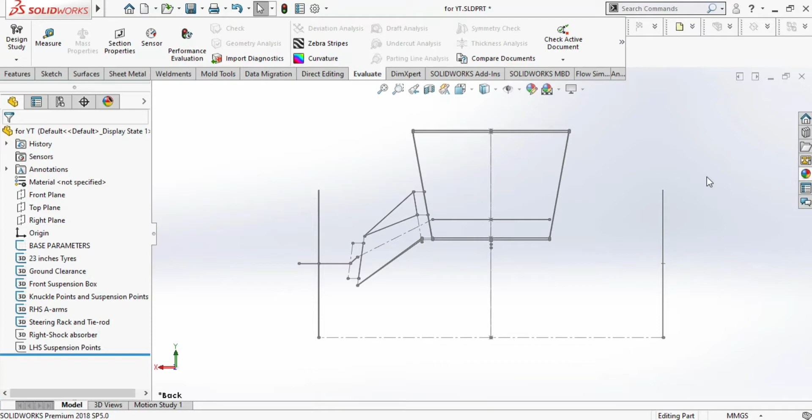In today's video, I'm going to show you guys how you can design a suspension knuckle or an upright. It will be a simple design, but you can take references from it and adapt as per your requirement and designing needs. So without wasting much time, let us begin. I am creating the suspension knuckle on the double wishbone suspension geometry.

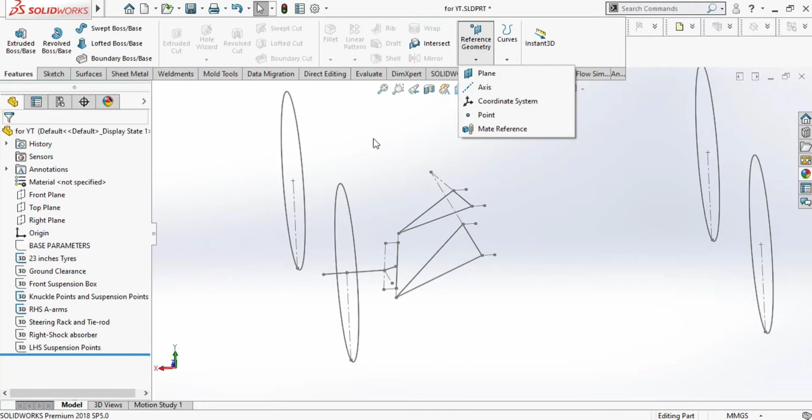Firstly, we will create a plane which will pass through the steering axis, or caster angle axis. For that we need three references. First two will be the references which are upper ball joint and lower ball joint coordinates, and the third reference will be the main right plane.

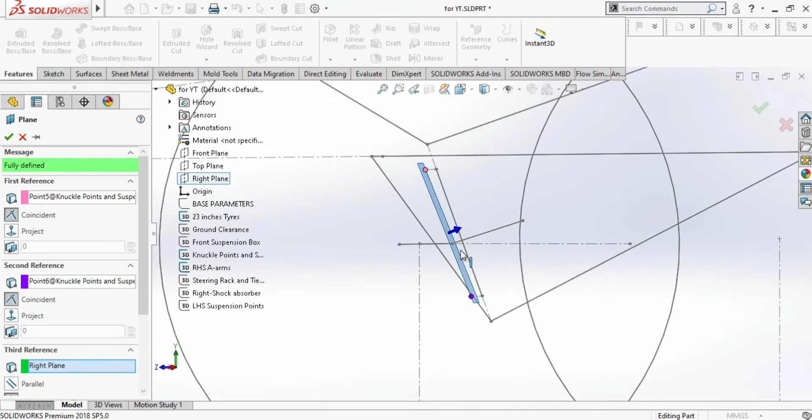It should be looking like a line when viewed from side view, and a flat plane when viewed from front view. So click OK and our plane is ready.

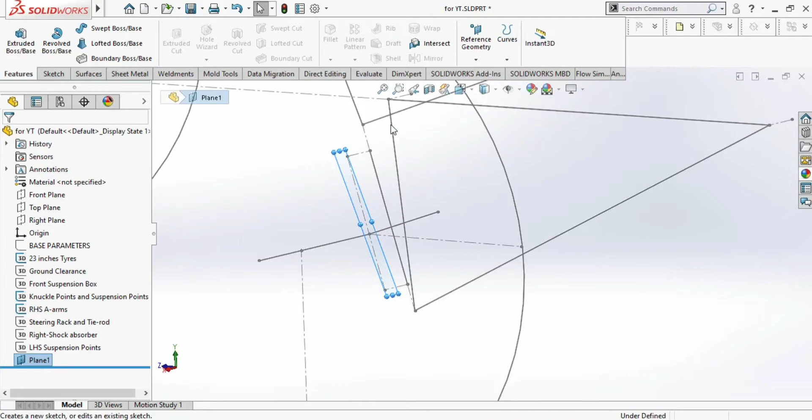Now we will sketch on this plane. Select this plane and go to create sketch, then press Ctrl+1 to switch to the front plane view, as we will create the sketch in this view.

Here we are creating the resting platform for mounting the upper ball joint and lower ball joint. Their bearing seat with washers will be fastened here.

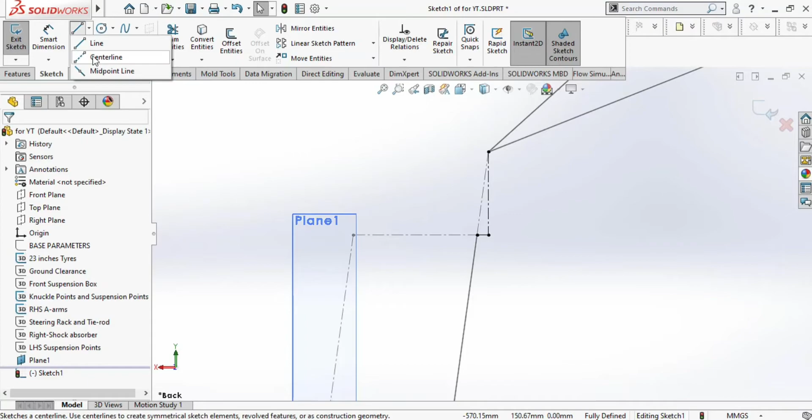After creating these reference lines, make a line passing from the midway and later make a rectangle. We have to leave the space above for the bearing seat of the A-arm to sit on top. Now give dimension to this sketch and we are done for the upper ball joint bearing seat resting platform.

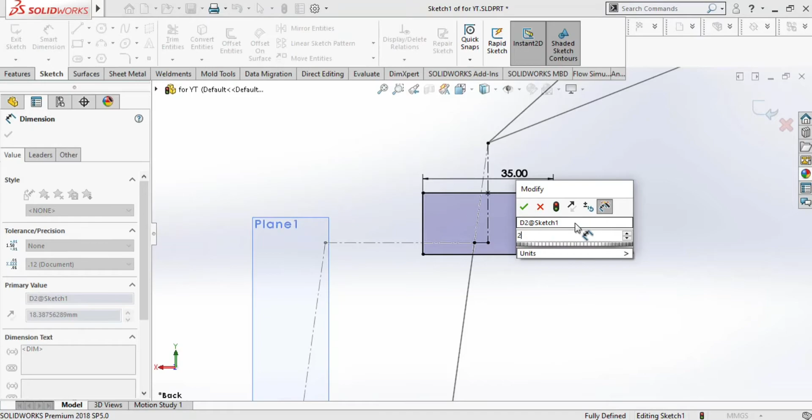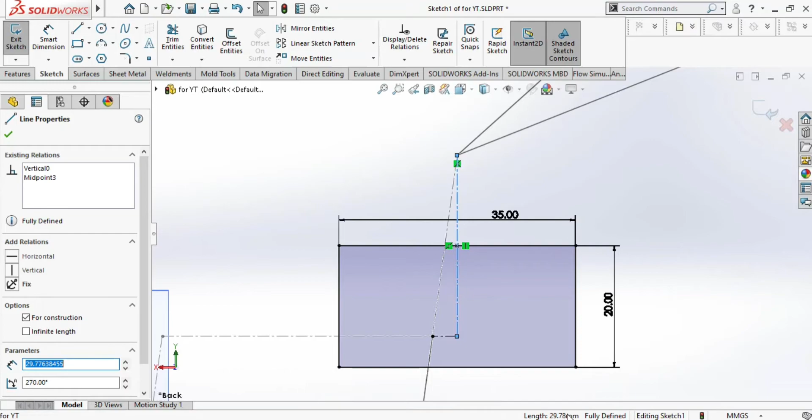Similarly, we will sketch for the lower ball joint bearing seat platform. We are creating the platform below the lower ball joint suspension point, so that the bearing seat of the lower ball joint will sit above the lower resting platform.

Here make the reference line of half length, and from the lower point of this line make a rectangular shaped platform of the same dimension which we made above.

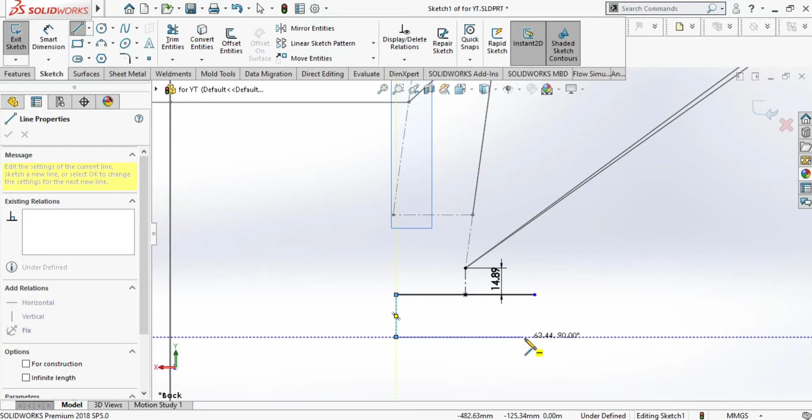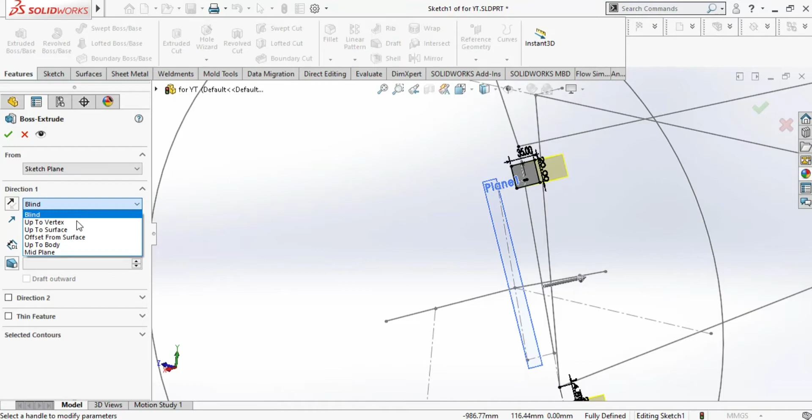Now we will extrude these sketches along the direction of the plane which we have created, using the mid-plane option, as we want to add material on both sides. Extrude length will be 30 mm, press OK. So this is how initially the upper and lower platform will look like.

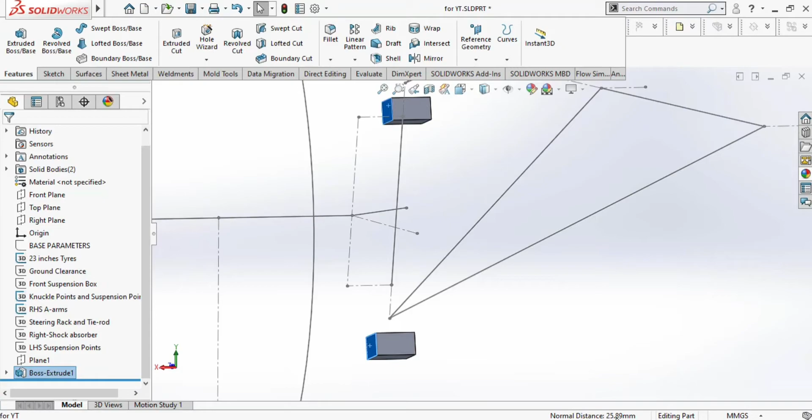Now we will create a plane on which we will sketch the main central body of the suspension knuckle, which will hold the spindle. That plane needs to be at an offset equal to 25 mm from the back face of the lower resting platform. After doing that, press OK.

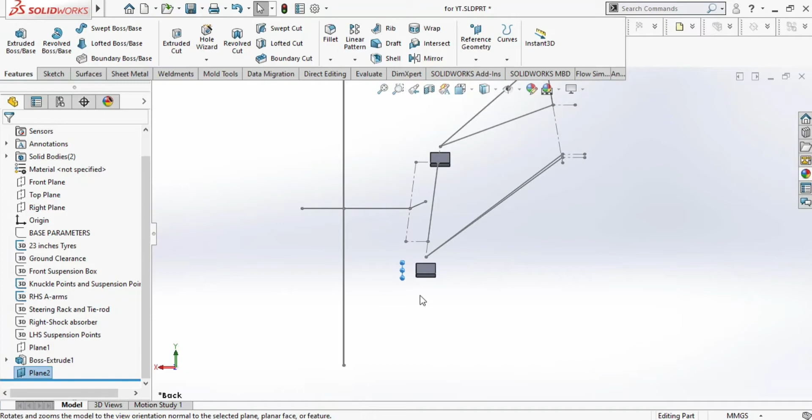Now we will do sketching for the main central body on this plane. So let's create a sketch on this plane. First create a circle for reference around which we will create a rectangular enclosure.

Now make a double-sided line which will be perpendicular to the steering axis. Similarly, draw another double-sided line below the circle. Now give the relation and dimension to these lines.

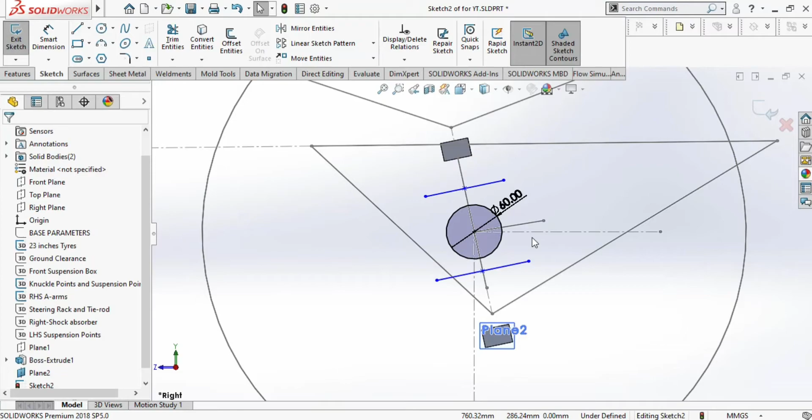Coincide the midpoint on the steering axis, and similarly for the line below. After that, join the upper and lower lines.

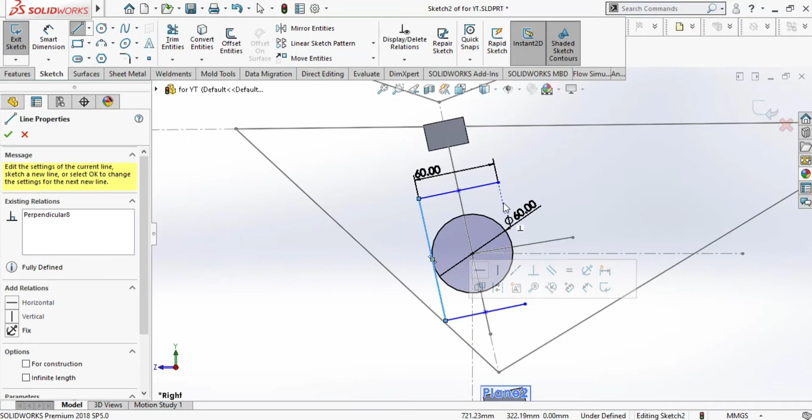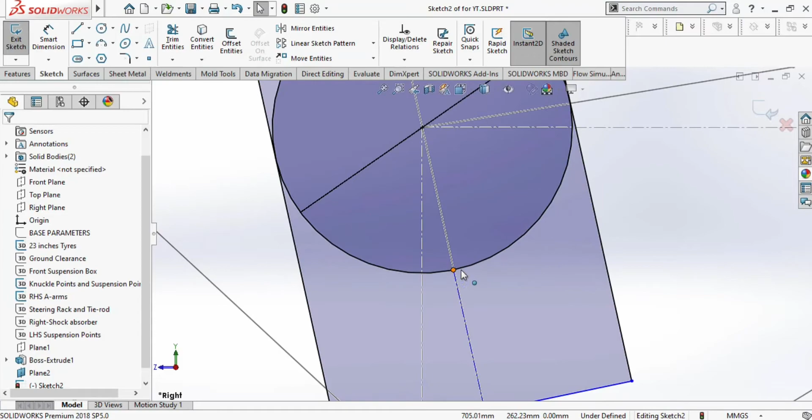Then connect the upper line to the circle with the help of a reference line and give dimension to that reference line. Similarly do for the line below.

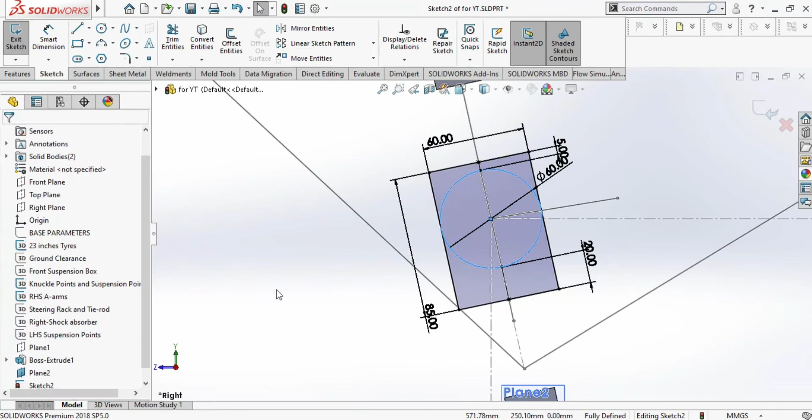After giving dimensions to all the lines, we will extrude this sketch to a length of 25 mm towards outward, and our central body is done now.

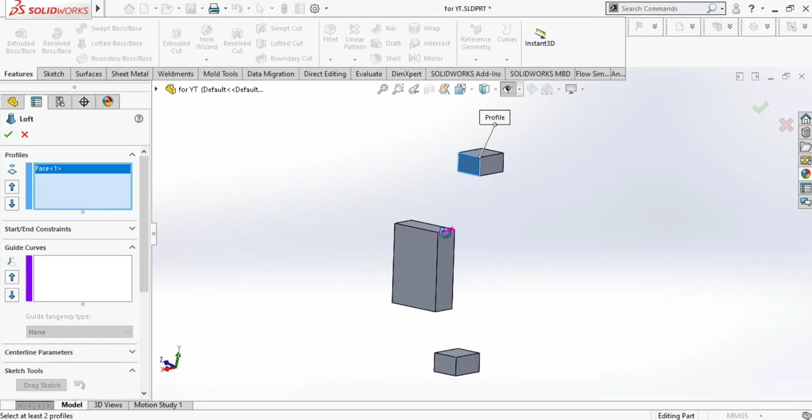Now we will connect the resting platform of the upper ball joint and lower ball joint to this central body with the help of the lofted boss feature. Here we have to link the back face of the upper ball joint resting platform to the top face of the main central body and align the guiding curve accurately.

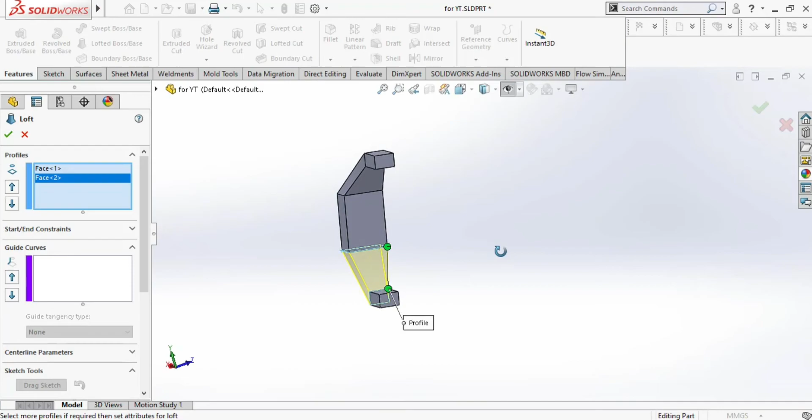Similarly, we will do for the lower section as well. Our main body structure of the suspension knuckle is completed now.

Now we will create the wheel spindle. For that, select this face and sketch on it. Select a circle and make its center coincident on the wheel axis.

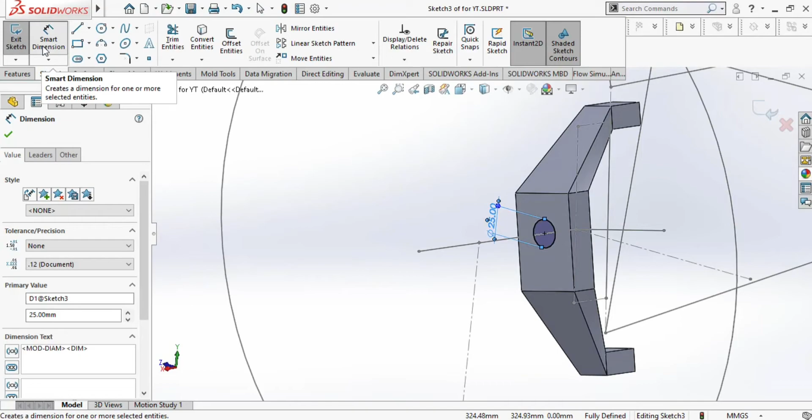After that, define the circle by assigning a diameter of 25 mm, and then extrude it up to the end point of the spindle. Then press OK.

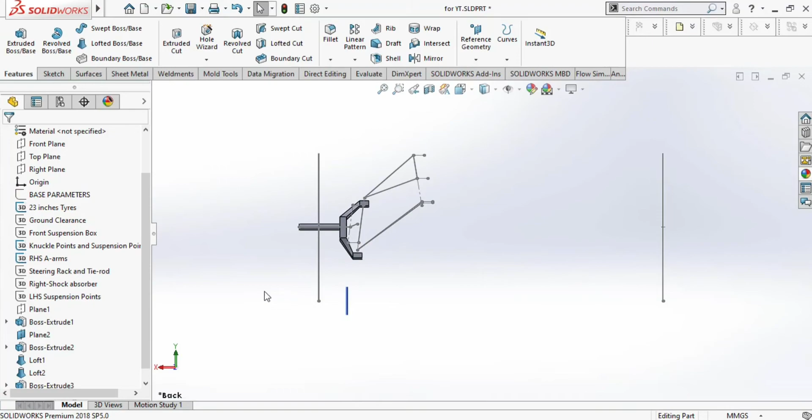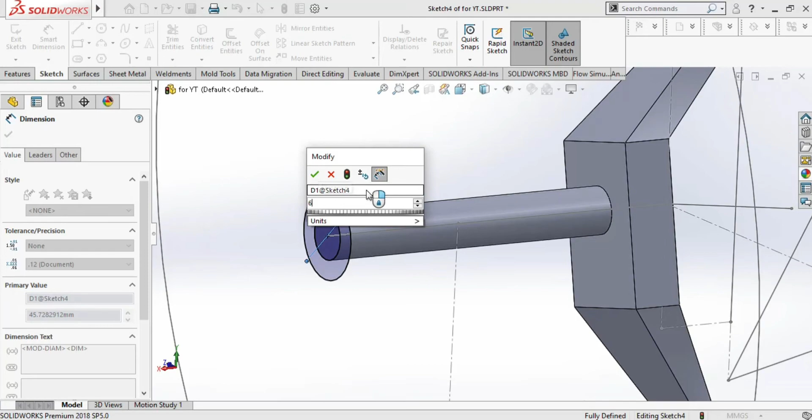Now we need to create a bearing seat and shoulder on the spindle, which will hold the hub bearing and the hub itself. Firstly, we will create a shoulder which will act as a support and a stopper to the hub bearing. It should be enough in diameter to support the sidewall of the bearing, and keep the thickness of shoulder at 6 mm.

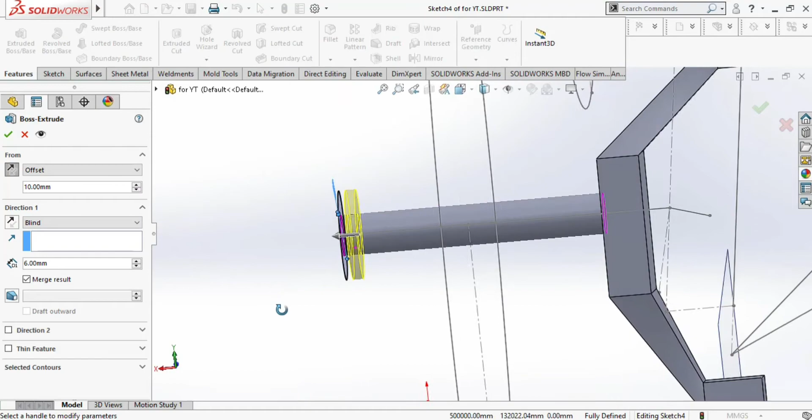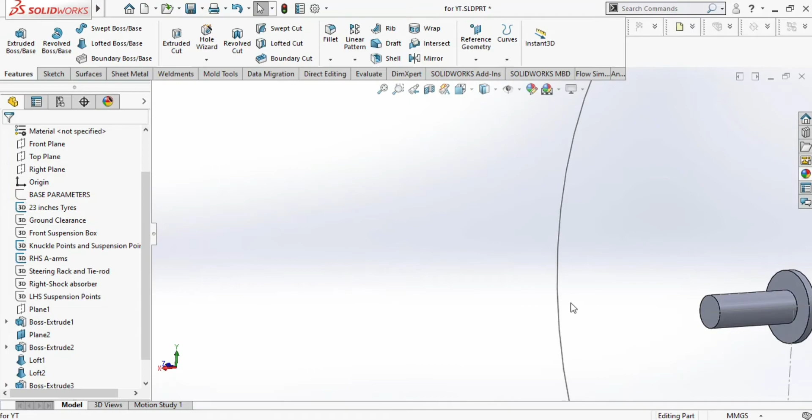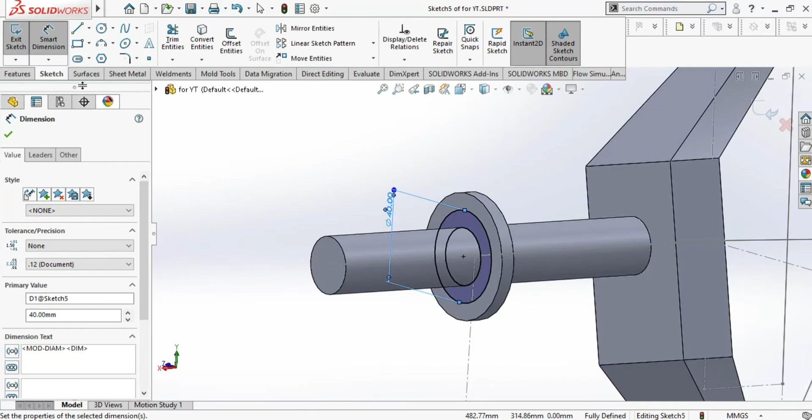After that, create the seat on which the inner race of the bearing will rotate. It should be thick enough to cover the thickness of bearing. I am assuming the thickness to be around 15 mm. And after that, press OK.

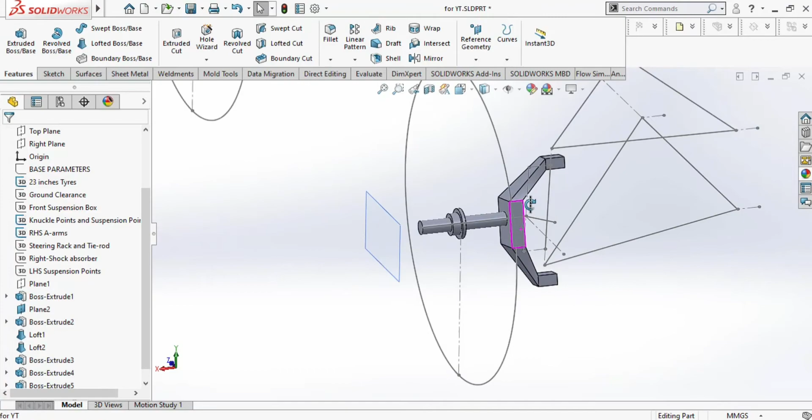Now we will create the design for steering arm. For that, first we need to create a reference plane with the help of suspension geometry coordinates. So create a reference plane. For that, select the steering pivot point and the wheel center point, and then select the main top plane. The reference plane will look like this, and after that, press OK.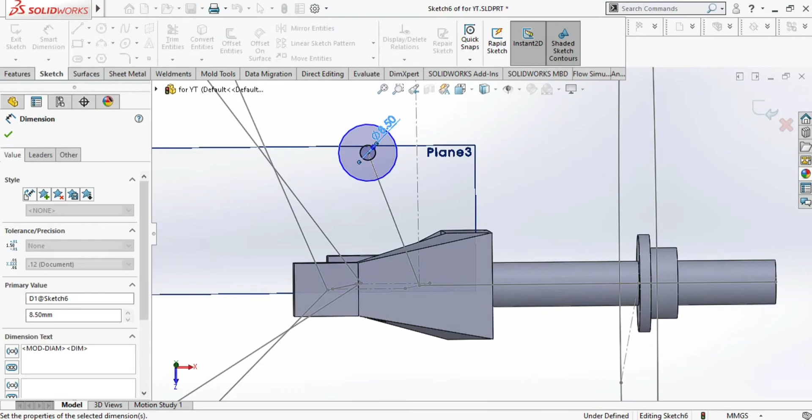Now we will sketch on this plane from the top view. Firstly, draw two concentric circles with the steering pivot point as the center, and dimension them according to the size of heim joint you are using. Heim joint is a tie rod end basically. Then extrude this sketch entity at an offset as the tie rod end will rest over this resting area.

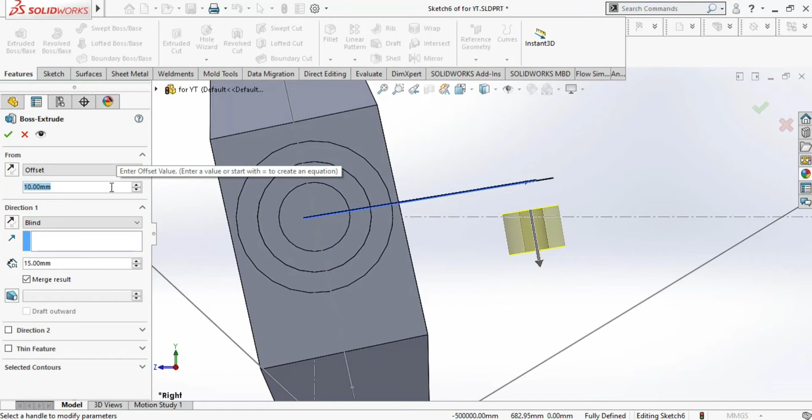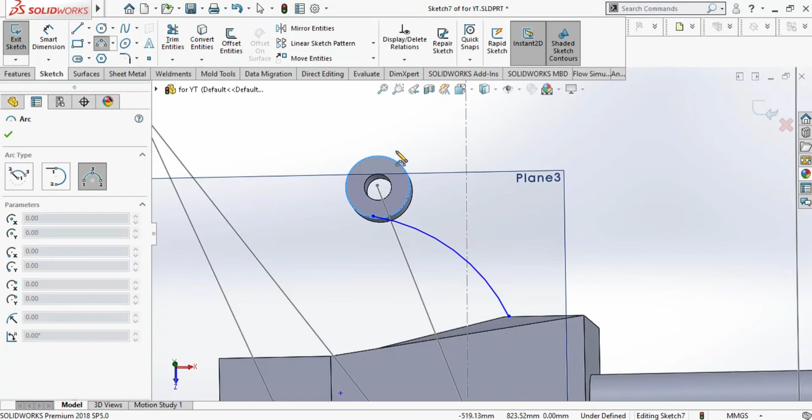Now we have to connect this part to the main knuckle body. For that, sketch on the same plane and connect using any type of design. You can connect this part to the main knuckle body using any type of sketch or design. I am making it like this, as it will counter the compressive and tensile forces when the vehicle is steered left or right.

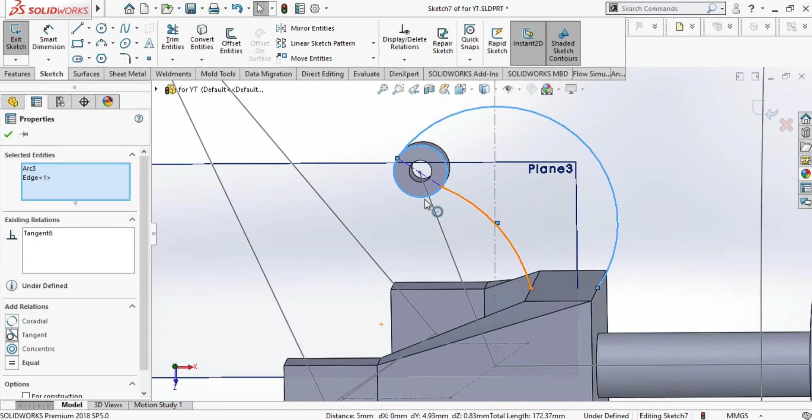Please note that whenever I do multiple selection of sketch entities like line, circle, I press and hold the left control key. So just keep in mind whenever you do the same.

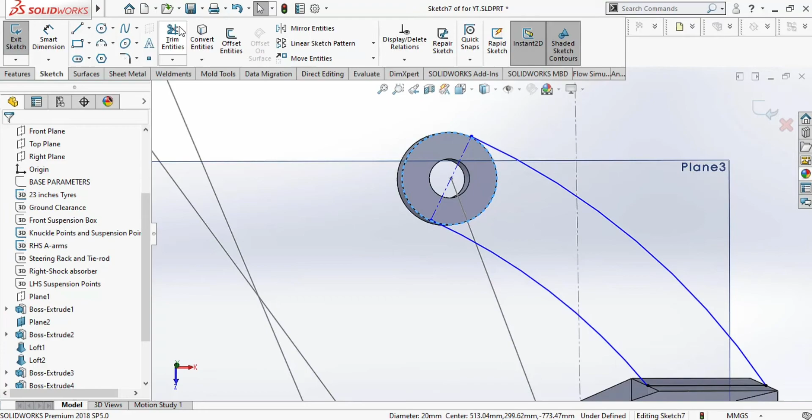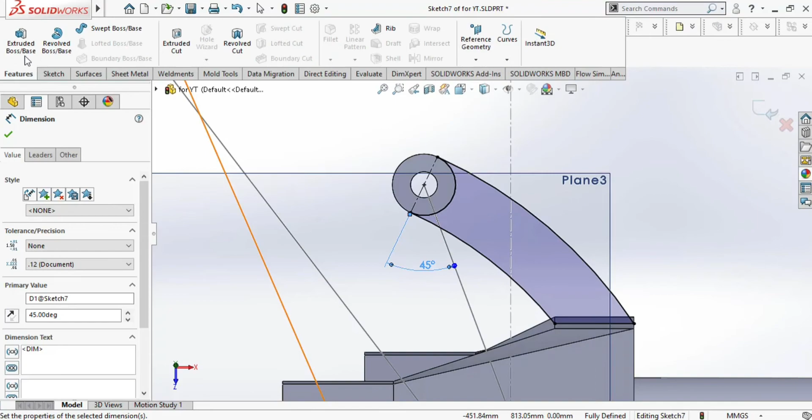Make sure you make a closed sketch entity. After that, go for extruding. I am keeping it in the middle way of the thickness of circular extrude.

To save some material and also support it in terms of strength, I am keeping its thickness less than circular extrude. After that, press OK and you are done with the steering arm design.

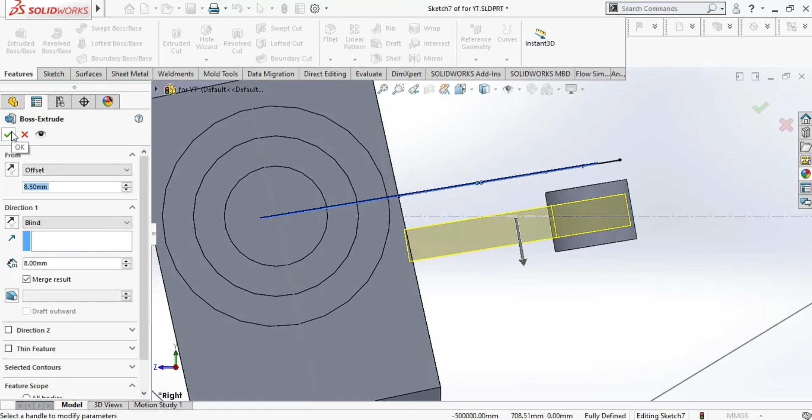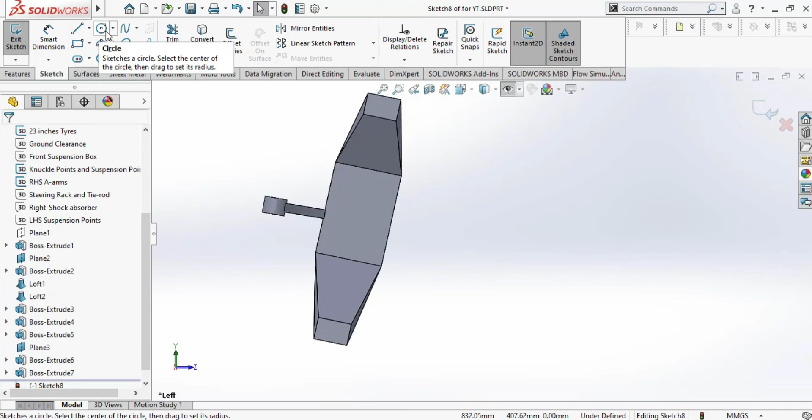Now we will create the design for brake caliper mount. Normally, there are various OEM companies' brake calipers available in the market. So based on your calculation of braking system, brake disc and other braking calculations, you can select any brake calipers of the available two-wheelers. That being said, I am fast forwarding the video now to reduce the video time, as this design is totally dependent on the type of brake caliper you are using.

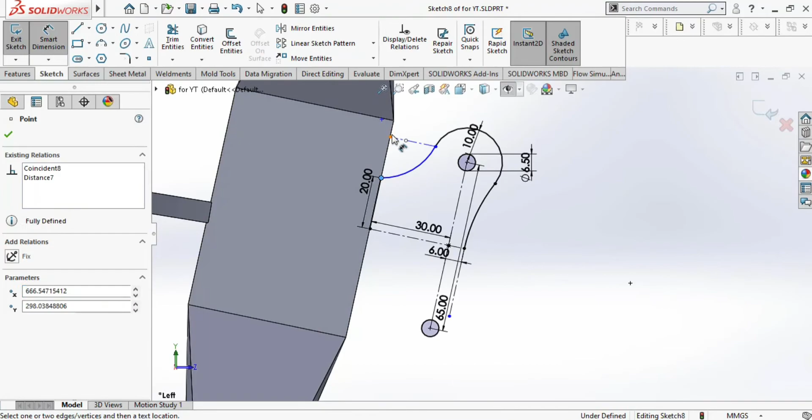I am designing this based on assumption and some past experiences. So you are welcome to take reference from it and use it and adapt as per your design.

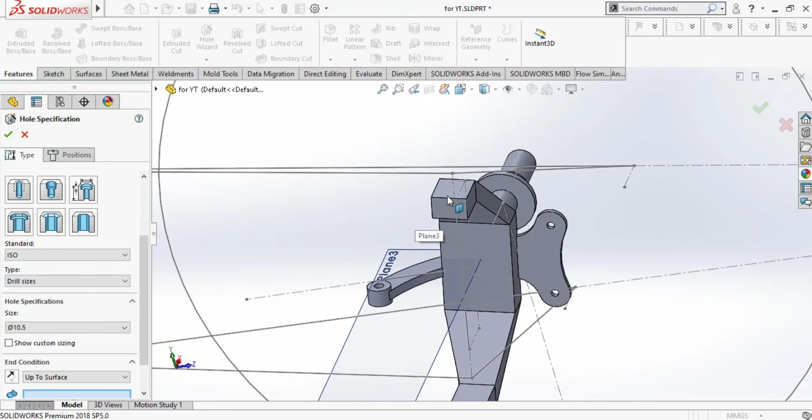Now we have to create holes for fastening the A-arms at upper ball joint and lower ball joint. For that we can directly go to hole wizard. Select the third option, which is normal hole, and keep the hole diameter of 10.5 mm for inserting a 10 mm bolt. After that, position the hole on the steering axis.

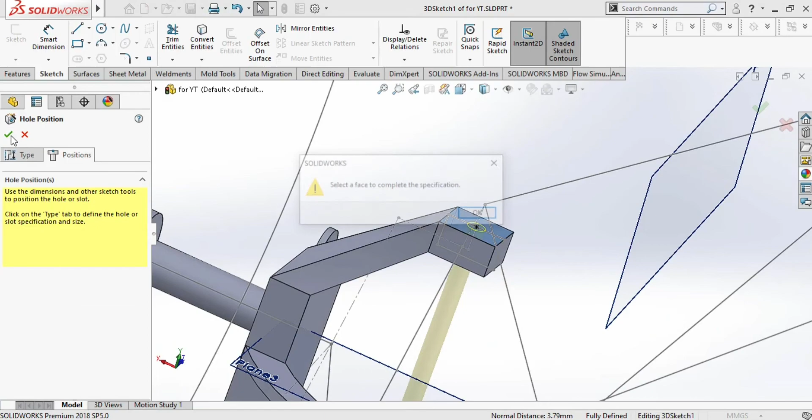You can make the center of the circle coincident on the reference line which we made earlier for the resting platform of upper ball joint and lower ball joint. Now do the same process for the lower ball joint as well.

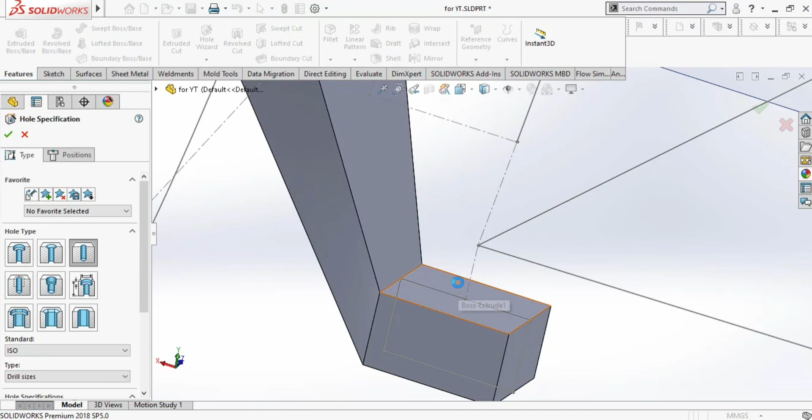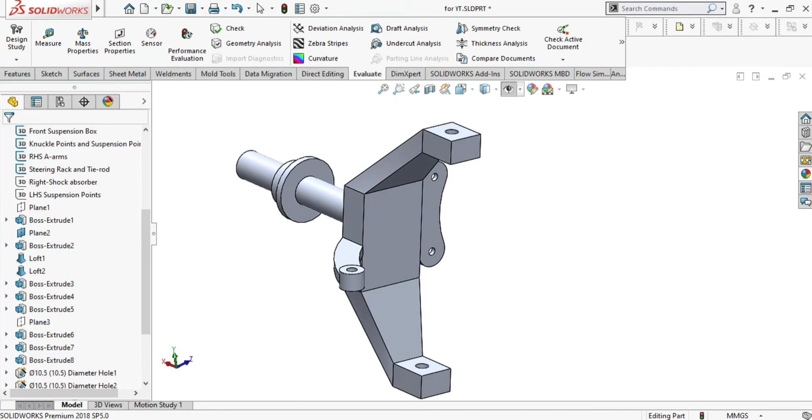And your suspension knuckle is ready. After this, you can apply material like steel or aluminum and you can measure the mass of it. Based on the mass, you can do weight reduction on your suspension knuckle, as long as your FEA analysis gives you a good factor of safety.